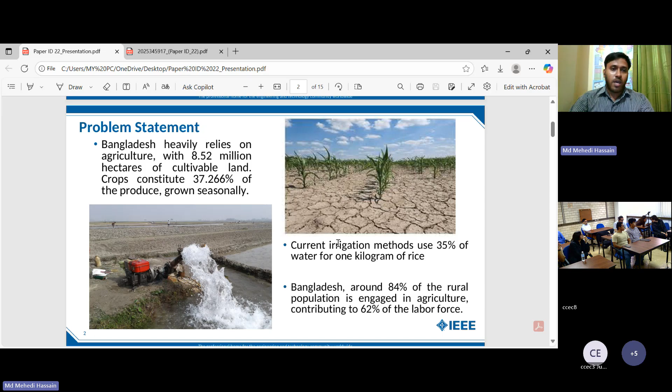Our main objective in this research is to build a smart irrigation management system, a reliable and easy monitoring system, reducing the complexity of existing systems, and making it cost effective, because most people in Bangladesh cannot afford costly irrigation systems. That's why we focused on this issue.

First of all, Bangladesh is a riverine country. Around 54 rivers flow across the country, covering two-thirds of our total land. This is always dependent on tides, high and low, and that's why canal water monitoring is an important issue in Bangladesh.

It can also involve pumping water, and some of this research includes tools for that. Some research can detect soil moisture, some detect rainwater, as well as daylight and sunlight monitoring, to determine whether it is day or night.

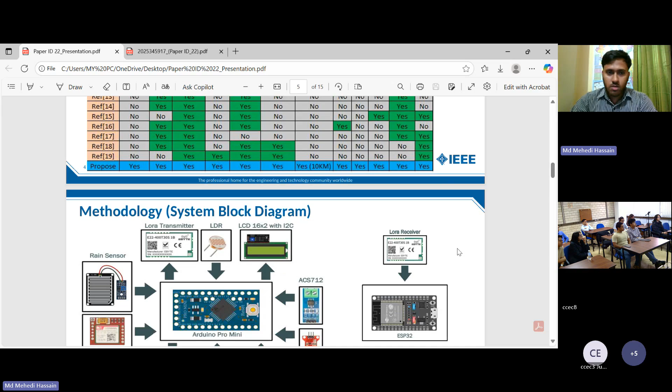Our system has two parts: one is the transmitter part and another is the receiver part. In the transmitter part, the operations are accumulated with an Arduino Pro Mini, and we also have an LCD monitor, LDR, and an asynchronous water level sensor.

We also have a soil moisture sensor, humidity sensor, and a relay for controlling water pump switching, as well as a rain sensor, and for SMS notification we use GSM.

The other part is the receiver, using LoRa, and it is accumulated with an ESP32 microcontroller.

This is the system workflow for the transmitter part. In the transmitter part, all sensors have a threshold value to determine which operation, like pumping, can start or stop. All these parameters are checked gradually, and there are two decisions: motor on or motor off.

In the other part, there is the receiver operation where all data is stored in a data server using ESP32 and received via LoRa.

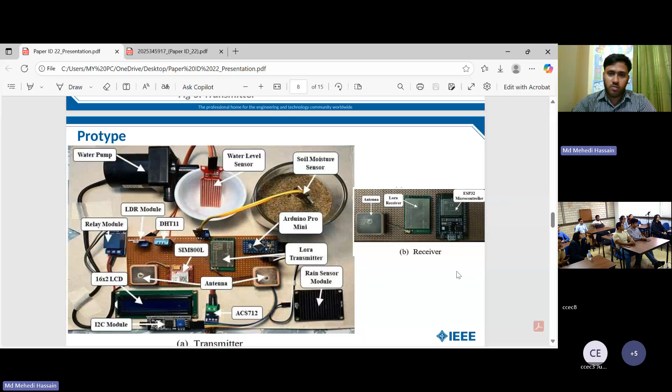There are many visual representations for monitoring all this data. On-site LCDs can gradually monitor all the data, and we are also building a mobile app that can monitor all the data gradually.

We also have a website, built using Node.js, Next.js, and CSS, and a MySQL database for storing large amounts of data.

In conclusion, it's a real-time monitoring system, easily accessible through website, mobile app, and email for long distance. In the future, it can be integrated with machine learning for predicting and analyzing large amounts of data easily, and there will also be implementation of renewable sources for sustainability.

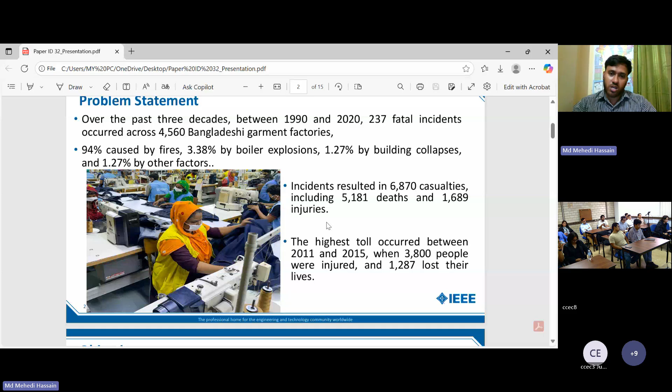Given this assessment, we have focused this research on an environmentally friendly industrial automation system, focused overall on garments workers as well as the factory, to increase factory safety. Our main objective is to build a low cost industrial central automation system, increase safety, enable easy monitoring, reduce existing complexity, and be cost effective. In comparison with previous research, some of these precaution measures include an LCD, SMS, buzzer, or mail, mobile app, or website.

Some have been focused on fire detection, temperature control and detection, as well as water sprinkling whenever fire incidents occur. Some have also focused on gas detection, and most of these factories don't have exhaust fan cooling systems, which is a main root cause of incidents in Bangladesh. Some of these incidents occur irregularly, and currently it can be improved.

Industrial load control is another big issue for our factories, because some factories don't care about this issue, and there needs to be a good risk assessment to prevent accidents. Our system also has manual control as well as a touch sensor for running this operation on and off.

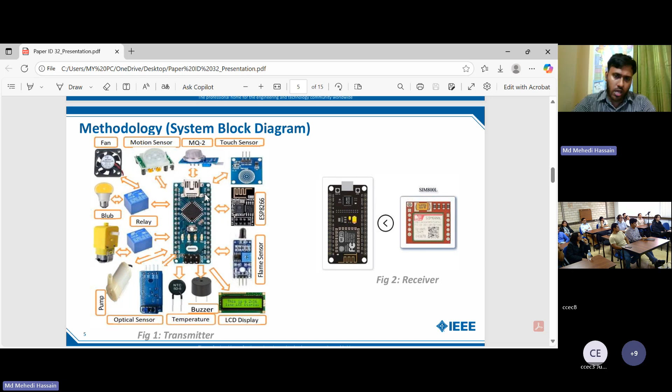This system has an assessment of input values, and some of these sensors are analog sensors. In the triggers, the signal is converted to digital for faster sensing. The data communication also uses HTTPS protocol for secure communication, protecting against external threats.

All the sensors include a fire sensor, optical sensor, motion buzzer sensor, relays, and exhaust fan. For the load in the prototype, we used a light to monitor these issues. There is also a DC motor.

for fire sparking. In the receiving part, a Node MCU and a GSM module are used for on-site data availability and SMS communication.

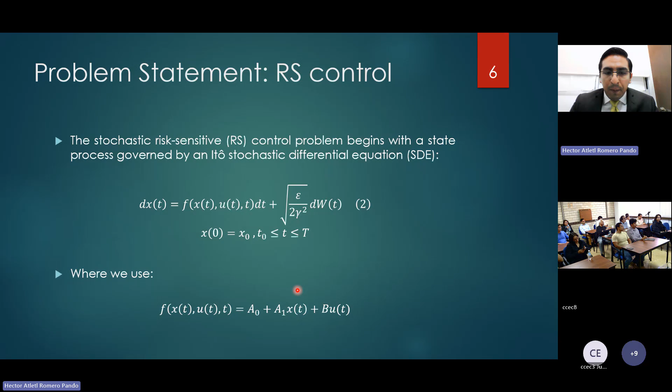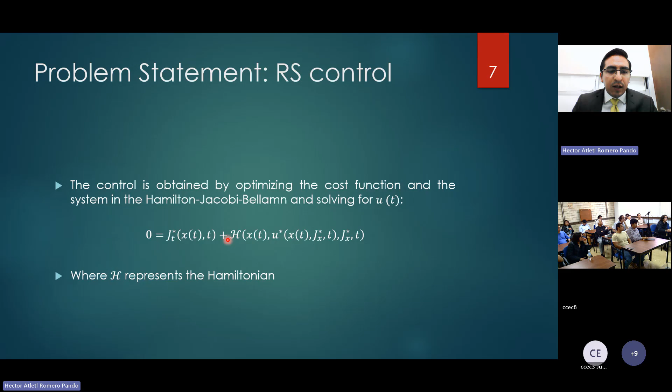Having a linear system, here for the functional, we obtain the control law by optimizing in the Hamilton-Jacobi-Bellman equation and solving for the optimal control, which in our case is U. This U star is our optimal control, and here H represents the Hamiltonian.

We begin with the application: the simple pendulum, a classical mechanical system that exhibits periodic motion. But the particularity of this system is that we are going to use the nonlinear model of the pendulum. In our case, we are under the effect of a DC motor that introduces a torque variable, which is going to be our control signal.

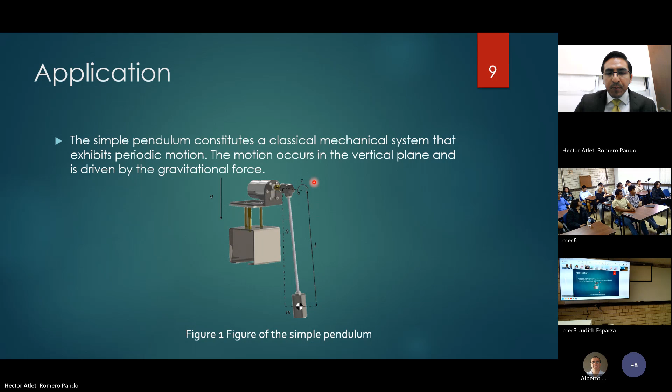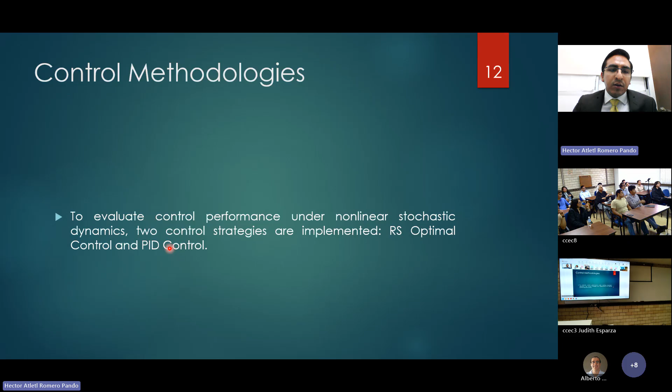To evaluate performance under nonlinear stochastic dynamics, we are going to implement risk-sensitive optimal control and PID control, comparing both. First, we begin with risk-sensitive optimal control. After introducing the Hamilton-Jacobi-Bellman equation, we get this control law.

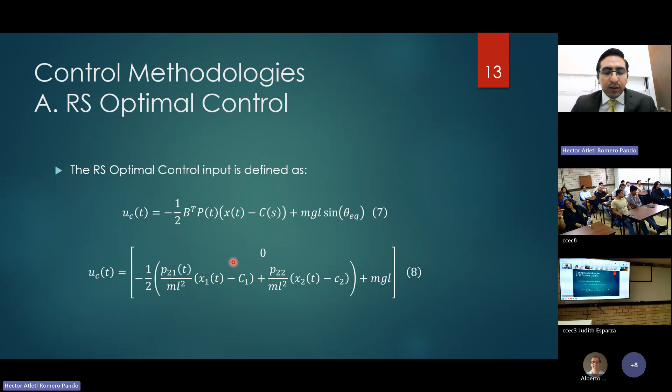This term is a gravity compensation. Developing the math a little more, we get this control vector, which indicates that in state 1 there is no control, and in state 2 this is the control that we are going to apply.

This is the asymptotic value for element 1,1. These are the asymptotic values for the 1,2 element, and these are the asymptotic values of element 2,2. Because this matrix is symmetric, elements 1,2 and 2,1 are the same.

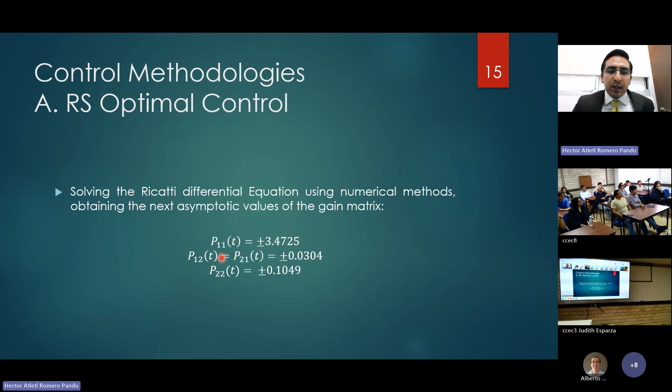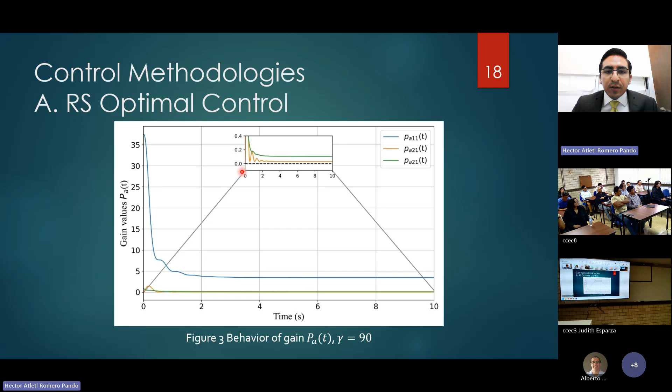So we can see here, this is the behavior of every element of the gain matrix. The blue is element 1,1, green is element 2,2, and orange is element 2,1. This is before we apply our transformation, and this is after. As we can see in the zoomed inset, the elements never cross zero, so it remains always positive.

Now, for PID control, we initially use the Ziegler-Nichols method for tuning. We start with a proportional gain of minus 5.438, integral minus 15.106, and for derivative gain minus 0.489. Our gains are negative because we are using the error in a non-conventional way.

The conventional way is desired point minus state. We are using state minus desired point. It is not going to affect our dynamics, we just have to adjust the sign of our gains.

So a subsequent manual adjustment was performed here to refine the new gains. For proportional gain, we keep it the same because we have already reached our target value. For integral, we reduce the gain in order to decrease the ponderative effect of the error, and we increase the derivative gain in order to smooth the curve of the system.

So now for results, the system was simulated in Python, and the state errors and values of the cost function and the data are summarized in the tables shown in this section. Our variable parameter is going to be our epsilon value, which allows us to regulate the influence of the noise.

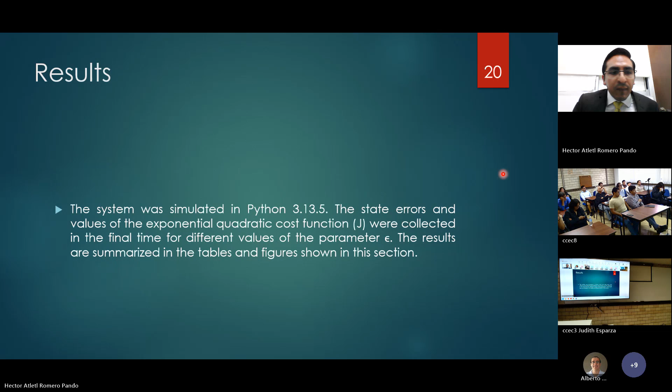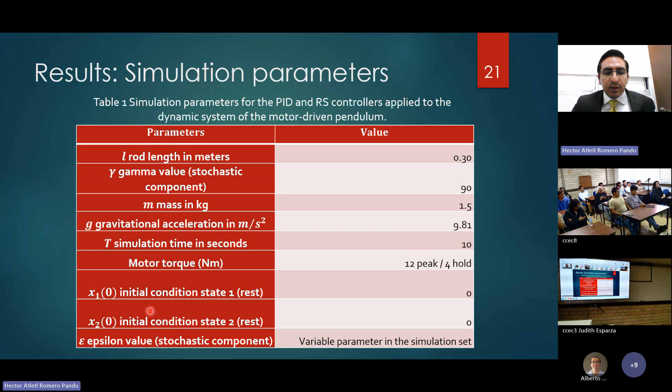So here are our parameters and the values we used. For the rod length, we used 0.3. For gamma, we use 90. For mass, we use 1.5 kilograms. The gravitational acceleration is convention, 9.81 meters per second squared. We simulated in 10 seconds. For motor torque in Newton meters, 12 on peak, 4 on hold. We start from rest, so both states start at 0, and we are going to vary epsilon in every simulation.

But in both trajectories, in both controls, the errors are so small that you can see both controls are effective, and the main difference is that the risk-sensitive has less cost values.

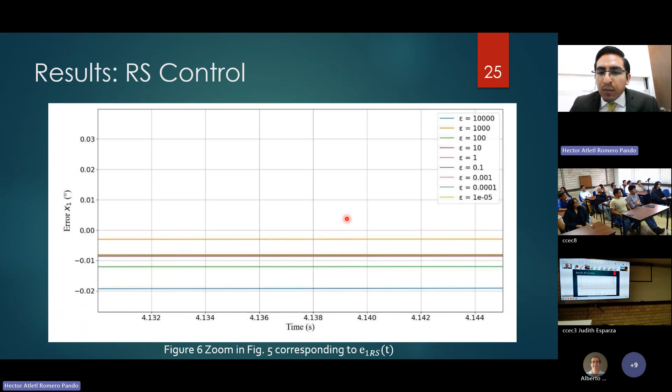We can see here also in the plot for the error of state 1. It seems to be just one trajectory, but as we zoom in the inset, we can see that the trajectories are enclosed approximately from minus 0.02 to 0. We can also see that as we increase the epsilon value, the dispersion of the trajectories increases, but for lower values of epsilon, the trajectories remain so close to each other.

And we have the same behavior for the error in state 2. The trajectories are so close that they seem to be just one trajectory, but in reality, they are just so close to each other.

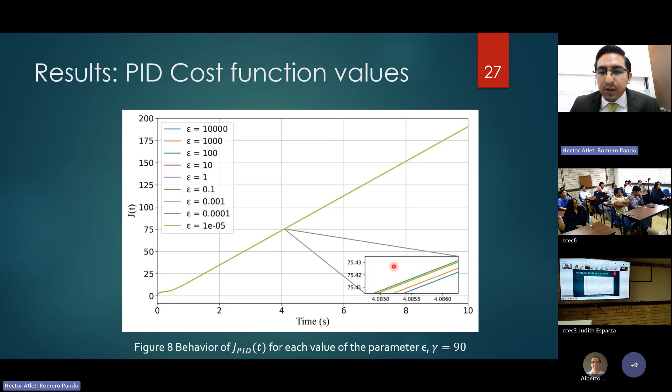And so here are the results for PID. For PID, we have the same behavior. As we can see here, the dispersion of the trajectories is a little more, but it's also so small compared to the scale.

For state 1, we have the same behavior. The trajectories remain close, but when we do an inset, we can see that the trajectories are enclosed between almost 0 and a little more than 0.01. And the same behavior remains that for lower values of epsilon, trajectories are so close to each other, and the dispersion increases as we increase the epsilon value.

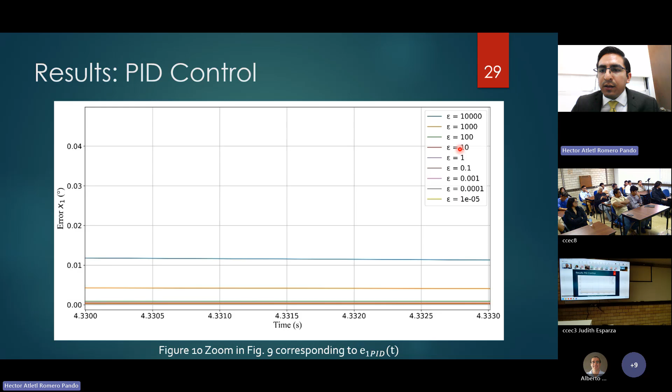And same behavior for state 2 in PID control.

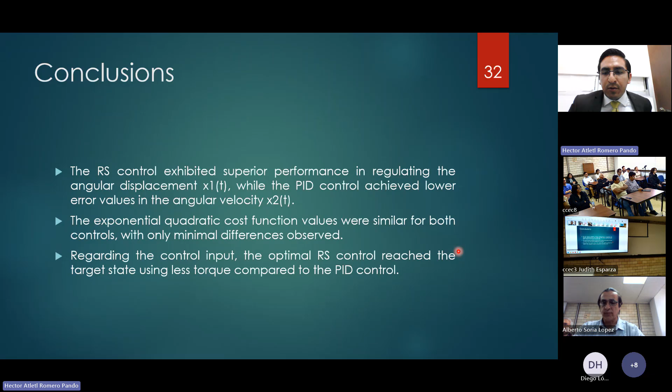So we can see that they have almost the same behavior in every aspect we have analyzed, but in the torque, the difference is much higher. And that's our references. Thank you for your attention.

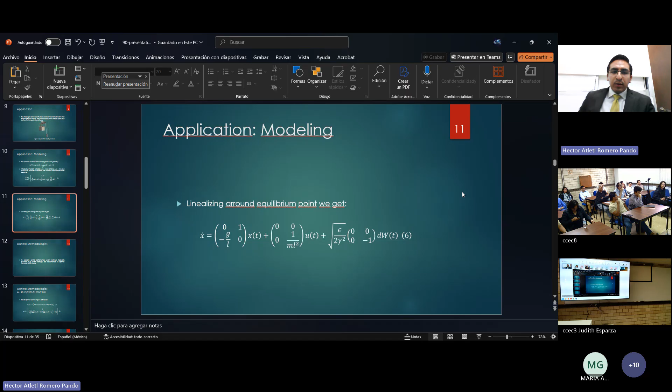But you haven't compared it to any other energy-based control strategy. We could have compared our method to any other, as long as we use the same measure tool, which in our case is our cost function. We evaluate them under this cost function. As long as we evaluate the controls under the same cost function, we can compare the controls.

Okay, thank you very much. If there's any question, then we'd like to thank the speaker for his presentation. We have a question, there's one more question. Yes.

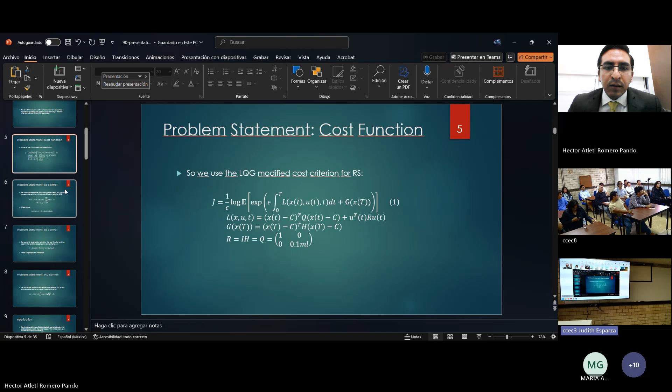When one is making experiments with noise, normally one should appreciate the effect of the noise on the graphics, maybe by making a zoom. Could you please comment about this? Because the noise is a quantity which one cannot do almost anything about. The noise should be present in your graphics, yes.

Yes, it is because the methods we are using are based on regulating the influence of the noise. So the behavior we expect is that the noise gets compensated. It can be seen in the result tables that the errors are on the order of exponent -3, exponent -4. So in the graphs, the scale isn't enough to appreciate the influence of the noise.

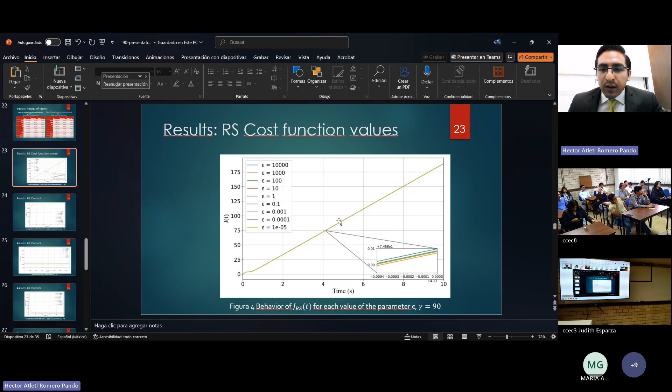But if we do a better zooming, the influence of the noise is visible. Maybe we could add that graph in a future article so the noise can be seen directly, because in our simulations we do in fact see the noise when we zoom in, but we have to zoom in. At the scales we have here, the influence of noise isn't visible.

No, I think it's not correct. Sorry. Oh, okay. Thank you, thank you. Okay, well, is there any other questions?

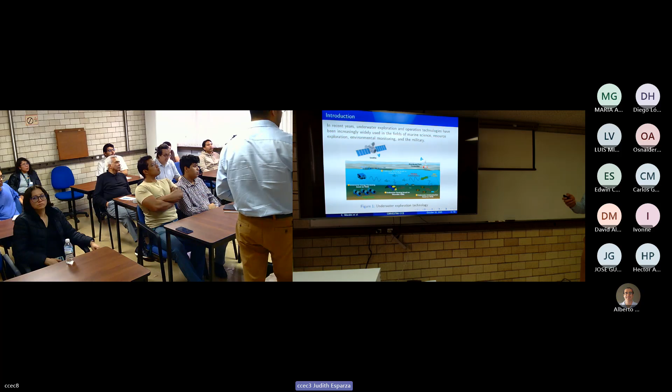Considering these frames, we can represent the mathematical model in the kinematics, or in the body frame, as given in equation 1. But to implement the controllers, we have to represent this first expression into the inertial frame, given in equation 2.

Let's make some assumptions about the vehicle that we modeled. First, the vehicle's motion is on the x-z plane, that is, in some way we can measure the states x, z, and theta.

We assume also that the roll and yaw angles are stable, that is equal to 0. Also, we consider that our vehicle is in low speed motion, about 2 meters per second. That implies that the Coriolis matrix is equivalent to 0, and the inertial matrix MA is diagonal, and the last assumption is that the vehicle is calibrated such that the buoyancy is neutral.

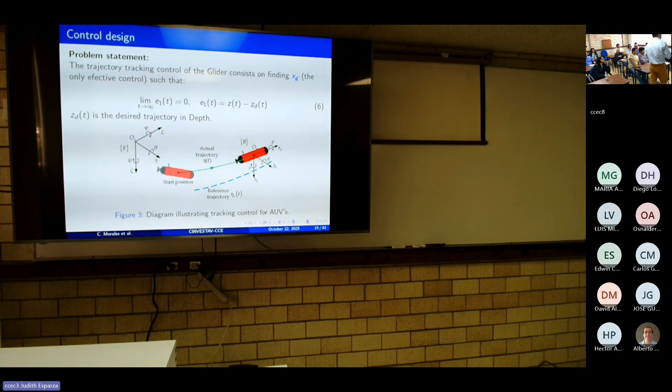In this case, we propose a super-twisting algorithm controller. This proposed controller is based on a sliding mode.

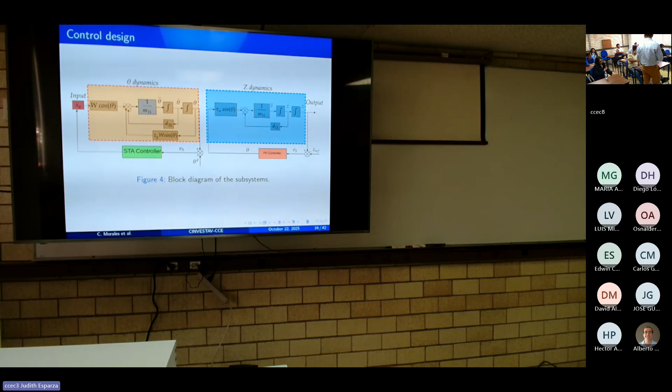Recalling the equations of the z and theta dynamics, we can define the trajectory tracking errors as expressed here, E1, E2, E3, and E4, where F theta is part of the dynamic model. After that, we can define the trajectory tracking dynamics as expressed in equation 9, corresponding to each dynamic, z and theta, and then we can propose the controllers for the z and theta dynamics.

For z dynamics, we propose a controller like a PD controller as expressed in equation 10. For the theta dynamics, we propose a controller as in equation 11, where USTA is the super-twisting algorithm, and F1, F2 are the compensation terms.

Now I will give the idea of the stability of the whole system. Before, we stabilized each system independently, but of course these systems are interconnected or coupled. So the way to make this interconnection is by using the backstepping philosophy.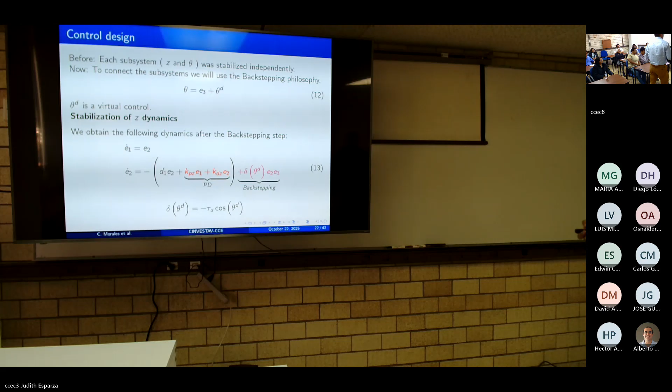To analyze the behavior of this dynamics, we can propose a Lyapunov function as given in equation 14. After carrying out the derivative of this Lyapunov function, we can get this inequality given in equation 15.

We have this positive term that arises from the backstepping step, and we have to deal with this term. To do that, we invoke Lemma 4.7 about input-to-state stability.

After carrying out some algebraic manipulation, we can find this expression given in 16, and with these conditions and this kind of functions, we can conclude that the system 13 is input-to-state stable.

Now I'm going to analyze the stability of the theta dynamics, given these dynamic errors corresponding to theta. With the control proposed in equation 11, and after defining our sliding variable as in equation 18, and after a change of variable, we can propose a Lyapunov function for this super-twisting algorithm as in equation 19.

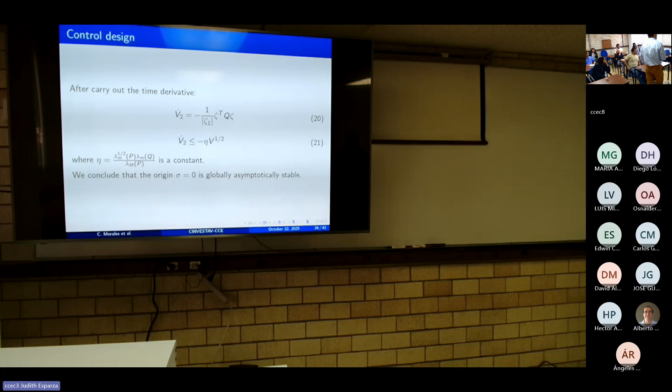After that, we can propose a composite Lyapunov function as given in equation 22, and the time derivative is given in 23.

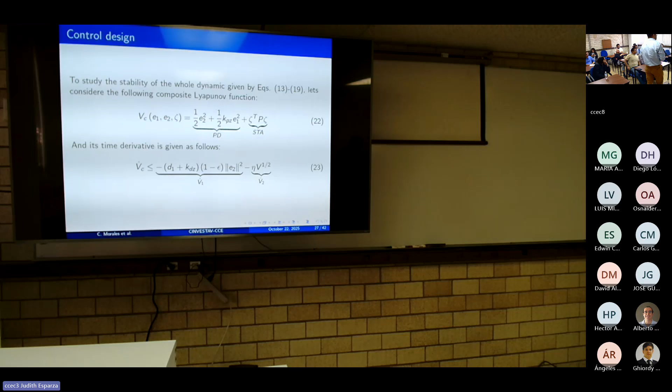By invoking lemma 4.7, which says that if the system 13 with E3 as input is input-to-state stable and the origin of the system 19 is globally asymptotically stable, then the origin of the whole interconnected system is globally asymptotically stable.

Now I'm going to show some simulations. In scenario one, we have the nominal case, where the robot follows trajectory tracking without any kind of disturbances. The second scenario, we applied a buoyancy disturbance that affects the depth dynamics. The third scenario is a disturbance affecting the control input XG.

First, we have here the trajectory tracking error, the trajectory tracking in depth and pitch. We can see that the smallest values of the errors are obtained with the proposed controller.

In the second scenario, we have the tracking in depth and pitch, and the smallest values of the tracking errors are obtained with the proposed PD-STA controller. Here we have the trajectory tracking errors in depth and pitch, and here we have the signal of the control input.

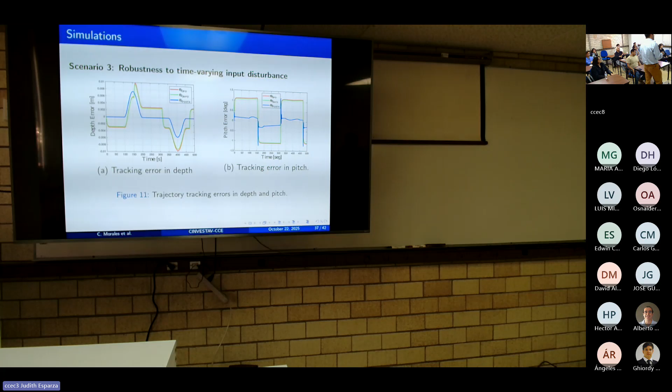The third scenario shows the depth tracking and pitch tracking. Again, we have the smallest values with the proposed controller. We also have the tracking errors, control input signal, and the conclusions.

The proposed controller addresses two key challenges on the underwater vehicles. The first is managing the underactuated dynamics of the system, and ensuring robust performance in the presence of disturbance and modeling uncertainties. The simulation results validated our proposed controller, which was compared with other controllers like PD and nonlinear PD, demonstrating that the proposed controller achieves better performance.

For future work, we would like to carry out some experiments in real time. So that's it. Thank you.

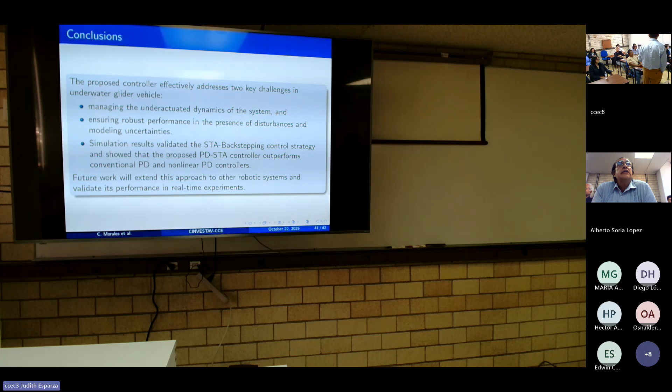Yes, but my question is more like, in real life, what does that represent? Like a current? Not like current. You can imagine that on the way the vehicle is navigating, you push something to affecting the depth dynamics. So it could represent that. Okay.

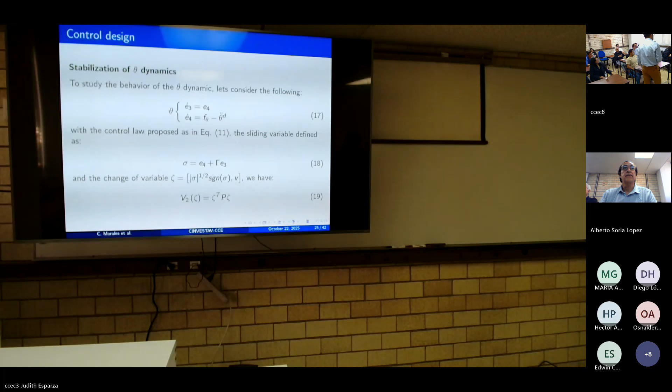Another question please, can you show us the design of the controller? The backstepping design? Yep. Here? No. Oh. Here? No.

Do you consider for the design the disturbance term in W1 and W2? You put that disturbance terms, one in equation number 7 and W2 in equation number 8. For the analysis, I did not consider this term.

Okay, so do you know, did you consider some characteristic of the disturbance? Is the disturbance bounded or differentiable? Actually, I'm not considering this perturbation term for the stability analysis.

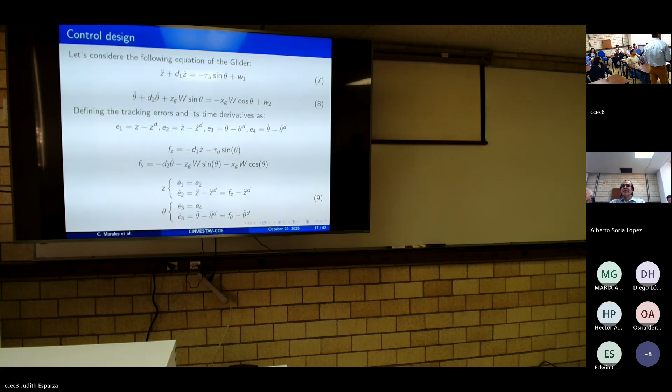When we make simulations and implement this kind of disturbance, we couldn't expect that this perturbation is the same in real experiments, and that we will have the same results. For example, the gains we use in PD or super twisting will not be the same in real experiments, so we have to retune them.

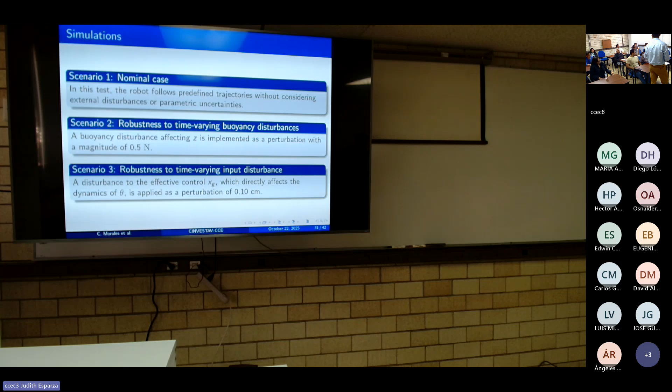Can you put the assumptions for your model? It was at the beginning. Yes, there, that one. Okay. How, because there are other assumptions in your model?

Yes, and how realistic is that to the real implementation? Does that happen, or how close is it? For example, this one could be realistic because in real time our vehicle is moving at low speed, not fast speed. So these assumptions could be realistic, and this could be realistic too because we calibrate the system so it will be enough for avoidance.

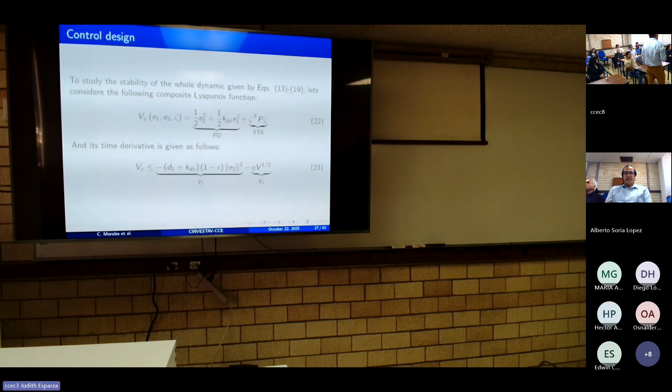Could you please go back to your simulations and give more details, because it's not very clear, it was very fast. If you are comparing, with respect to what? Because you propose a PD and a super twisting algorithm, you should have at least put in your slides the equation of the super twisting algorithm, for instance. And it is known that the analysis is good when you have total disturbance, for instance.

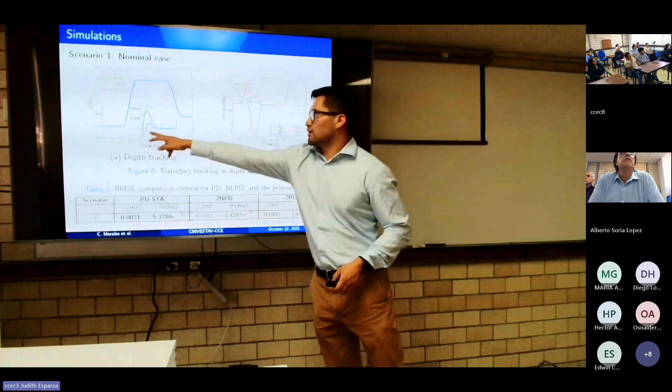In scenario one, we have the nominal case. We are comparing this PD. So the PD is in the first loop, in the z dynamics, and the STA is applied in the second dynamics, that's why it's PD-STA. Here we can see that the PD-STA has less overshoot.

Also here in the theta tracking. But here, for example, what does it mean, those two times PD? Two times PD, or two times nonlinear PD, is because if you remember we have two dynamics. Two PD means we propose a PD in the first dynamics, and another PD controller in the second dynamics, that's why it's two PD.

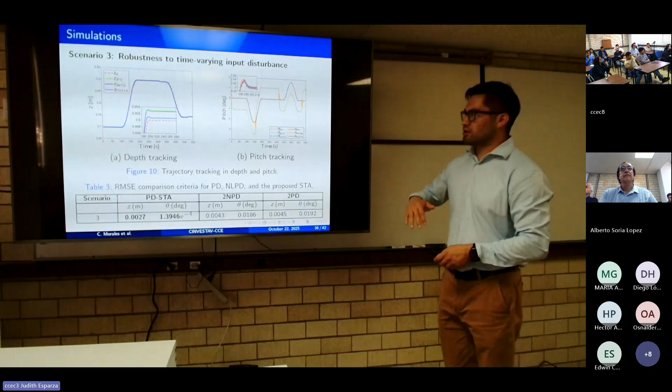Here, for example, we can see again that when we perturb the theta dynamics, we have less error with the proposed controller. And here, when we disturb the theta dynamics, of course we can see the results in the theta tracking. We can see that the proposed controller performs better. I don't know what else to say.

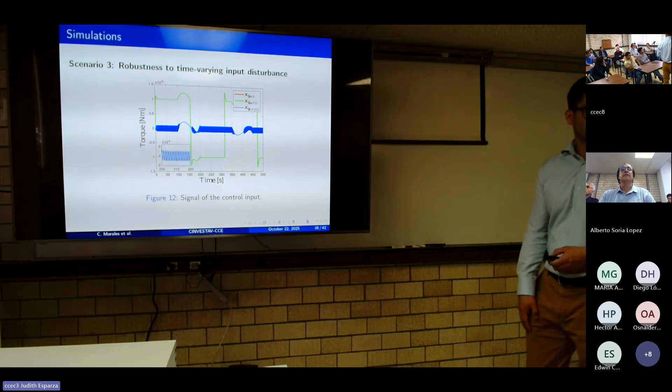Could you please show the equation of the input? Yes, with respect to the question of the organizer of the session: is this kind of oscillation acceptable for real-time applications? You are demanding a lot of work from your actuator. Maybe it's not a good solution. If I had my own glider, maybe I would not allow you to use this kind of thing, because you may destroy it.

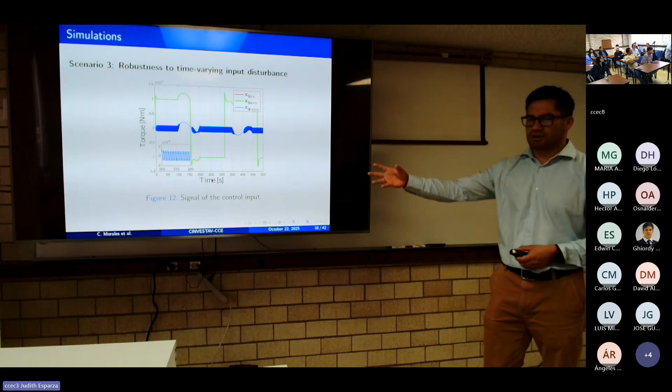Of course, when we use this kind of controller based on sliding mode, we have this kind of effect called chattering. Is that chattering, or is it oscillation? No, it's not chattering, it's oscillation, but this kind of oscillation could still not be good for motors. But we can see that the magnitude of this oscillation is very small, and if it's still not working, we can implement filters before this control input goes to the motors.

How can you improve this? We can implement a filter for this control input. Okay, thank you.

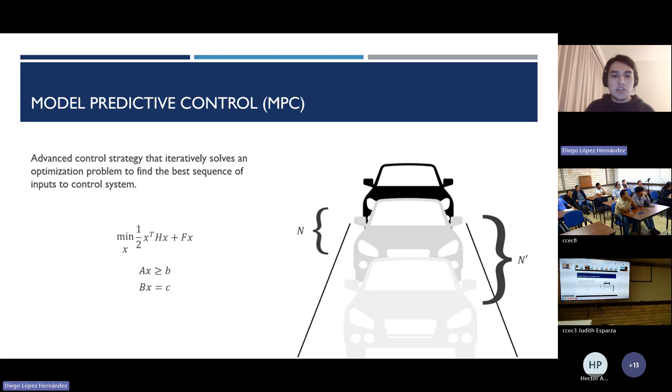The only difference between normal driver logic and model predictive control is that the controller actually takes into account all of the states leading up to that point ahead of time. So one might see clearly why the bigger the prediction horizon and the bigger the dimensions of the system, the bigger the computational load will be, which poses quite a problem for real-time applications.

And here is where we arrive at our objective, which is to propose strategies to apply model predictive control to embedded systems, specifically to holonomic robotic bases.

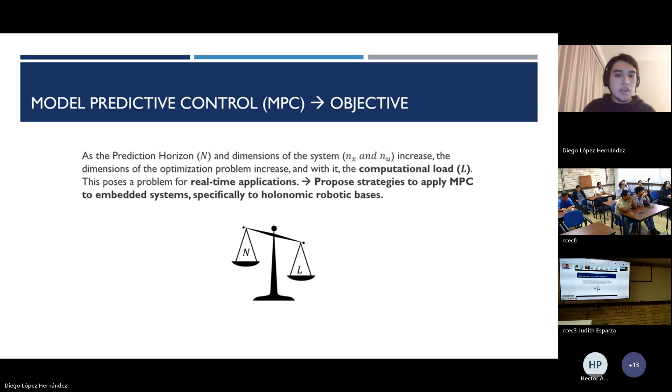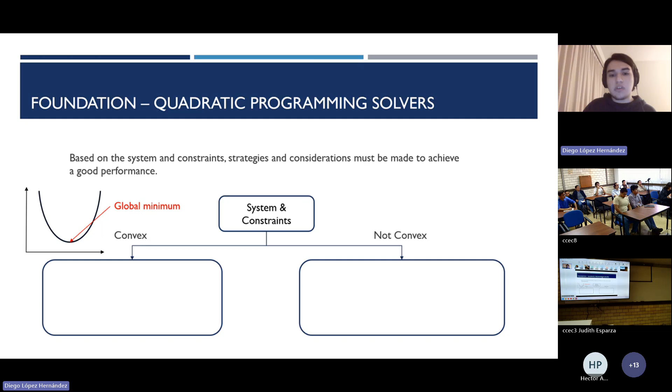First, let's talk about which types of systems we can have. For simplicity's sake, we'll define convex systems as those that have one global minimum instead of a local minimum. For these, you can usually apply linear model predictive control solvers like these ones. However, when you have a local minimum, you have to use a different strategy, because these solvers cannot distinguish between local and global minima, like sequential quadratic programming and learning-based methods.

Now, unfortunately, in robotics you usually have lots of rotation matrices, so you have to use nonlinear model predictive control if you want to actually find the global minimum for these types of systems. However, for holonomic robots, if what you truly care about is only the position and the computation time, you might make some considerations that will allow you to use first order methods. Which one? Well, we selected the proximal gradient method.

So you have your cost function, composed of a convex smooth part and maybe a non-smooth component. The proximal operator works by receiving an initial guess and finding a balance between the value of this non-smooth function and staying near that initial guess, which can be a bit abstract. But when the non-smooth function is the indicator function, because it is an optimization problem, it basically throws out any options outside of the feasible set, making this proximal operator a projection.

For the final part of this method, to actually get close to the minimum, you apply a gradient step, which depends on a constant that you define. And of course, this way you can ensure you will eventually arrive there.

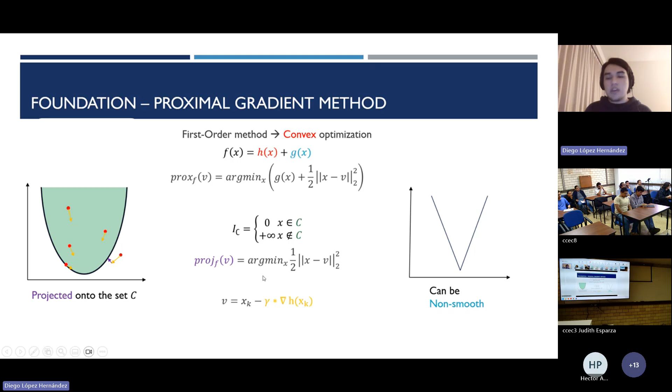In a practical example, it might look something like this: let's say in one iteration you have your optimal set of inputs, and in the next iteration, if you attempt to evaluate the same inputs, you might not have the same global minimum. So you have to apply the method again to get close to the minimum.

Now let's talk about the model of the robot itself. We chose a mecanum wheel base, a very well-known type of robot, where the wheels are responsible for the holonomic movement. Your model might look something like this: we have your state variables, the relationship between the wheel frames and the robot frame, your inertia matrices, rotation and linear, and your system.

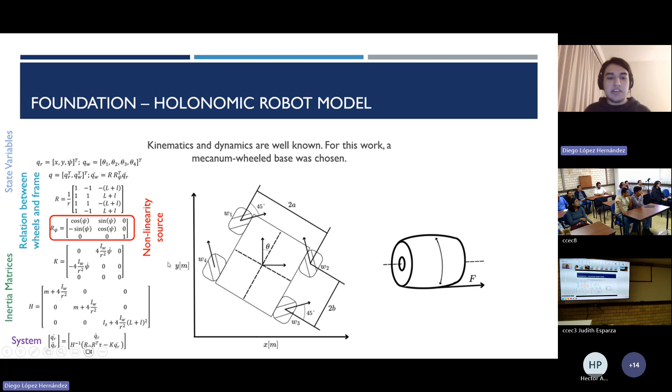Please note that the nonlinearity stems from the rotation matrices, but we will handle that soon. Let's rewrite the system as a state space representation like so, where we consider the inputs to be directly the torques of the motors, and the states being the position on X and Y and the angle, and of course their derivatives. So there we have 6 states. For notation purposes, we'll use I and O, referring to identity and zero matrices, like so.

Now, once again, considering that you only really care about the position of your holonomic robot base, and you really do not care what's the orientation of the robot, well, you might want to constrain the rotation movement like so, which would have the effect on the system by making it more compact and easier for the optimization problem.

For example, restraining this state will have the immediate effect in the state matrix like so. Now, please note that the rotation matrix is still considered, but instead of depending on a state, it will depend on the initial angle of the robot before beginning its movement. So, for example, if the initial angle is 0, the rotation matrix is actually an identity matrix.

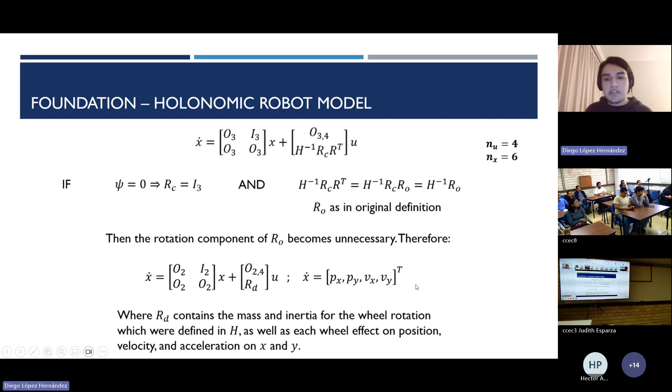Now, of course, since we're not considering the rotation, our model can be more compact, considering only the position in X and Y and its velocities, reducing the amount of states that we actually have to consider for the optimization problem. Now, the next consideration we will make stems from basically how the model was defined.

Because the wheels were enumerated in this order, we have this relationship between the wheels and the base frame. But if we notice something, we can rearrange the order in which we number the wheels and basically arrive at a conclusion that this is the same matrix twice, but concatenated to itself. So basically, we have the same system twice in a single system.

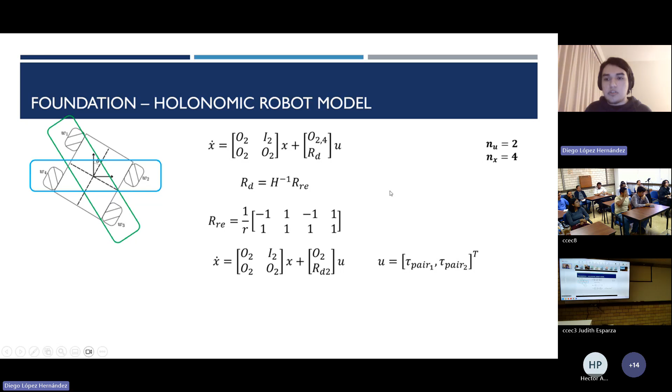And what this means is that we can group the diagonal pairs of wheels to reduce the amount of inputs we actually have to compute. Why? Because it is not necessary to compute the same thing twice. And of course, this would be the result of the model.

Now, lastly, for the last consideration, instead of using a single huge model predictive control for all of these states and inputs, we can use a cascaded control scheme where the PID controller, the common controller, handles feeding the set points to the motors, and the model predictive control can focus on the position and the odometry of the robot. Of course, this will have the effect of reducing the amount of time you would have to spend on each iteration to compute the inputs.

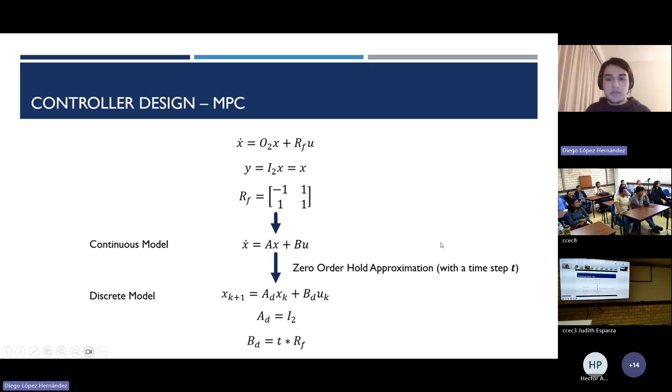So now that we have our continuous model, we can start to define the model predictive control by first transforming it to a discrete model with an approximation method, for example. And first we have to extrapolate this discrete model. Instead of the next state, we say the next 2 states, or how would it look like?

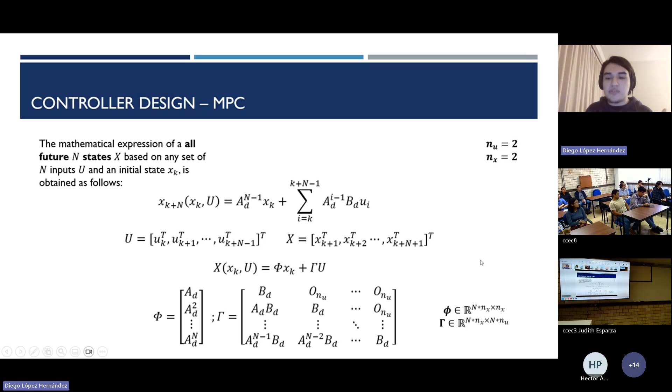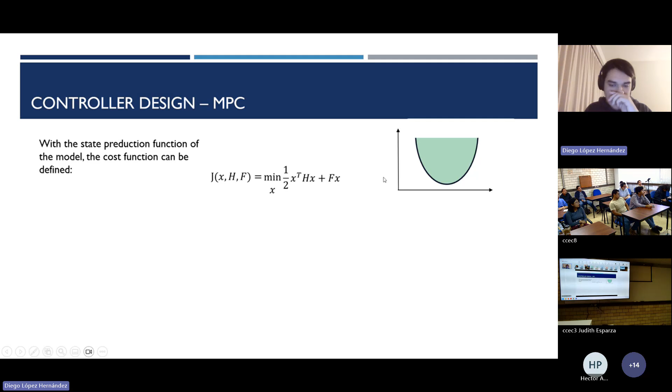So with this, we can begin to define the optimization problem, which usually looks like this, because it has to be convex to actually use the proposed method. So our cost function will look something like this, where the first thing of note is that the set point is the vector set point where we actually want our robot to go.

The first cost is the difference between the actual position and where the robot wants to go, so that at the end you arrive at the goal. The second cost is the magnitude of the input, so at the end of the motion you basically zero all of your motor accelerations. And the last cost is the difference between one input and another, so that you have a more smooth motion of your robot. Now, please note that each of these costs has a weight to it.

So by changing it, we will be able to change the behavior of the system. For example, we have to be careful by not making the cost of the input magnitude too high, because otherwise the other cost will never overcome that cost, and your robot would basically not move at all.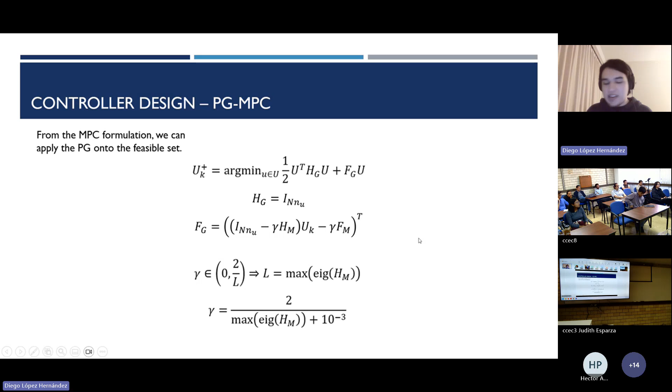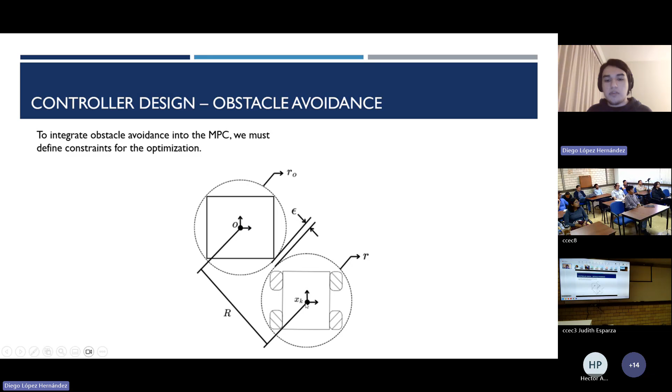Now, lastly, we have to consider obstacle avoidance for the robots. Normally, when you have a robot and an obstacle, you want to avoid collision, so you define keep-out zones like so. You can relate the origin frame of an obstacle and the origin frame of a robot to change that keep-out zone to something more like this.

We use a piecewise polynomial approximation that defines an inequality constraint based on where the robot is with respect to the obstacle. So it might look something like this. You have many overlapped keep-out zones, and the one that applies depends on where the robot is with respect to the obstacle.

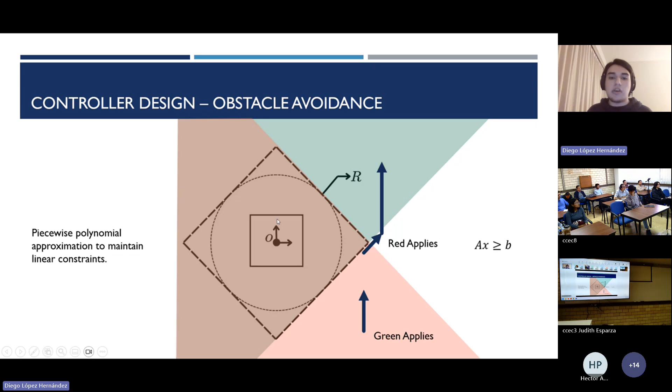For example, if you're over here and want to go over here, the actual keep-out zone would be the one in this quadrant rather than the one you're currently on. Once you move from quadrant to quadrant, the inequality constraint will switch.

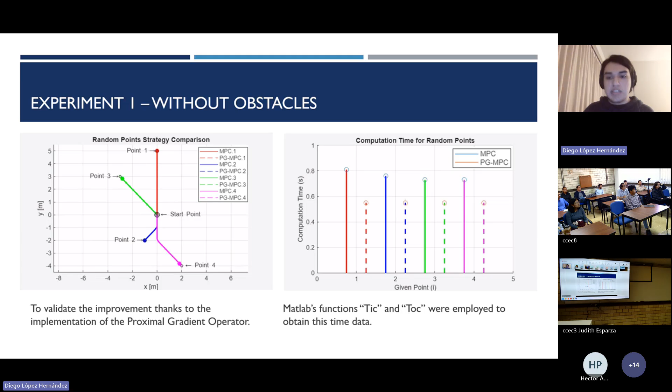First, we'll run one without obstacles to ensure that applying the proximal gradient method has a positive effect on computational time. We put timers on the code to measure how much time it took. We can see they both achieved the same convergence to the same point, however the proposed method is a bit faster.

With this proof, we can move to the next experiment, where we apply obstacle avoidance. Once again, we measure the time spent by each method, the normal one and the proximal gradient one, and we can clearly see the proposed method is still faster. Once again, they both competently avoid the obstacles and arrive at the designated goal.

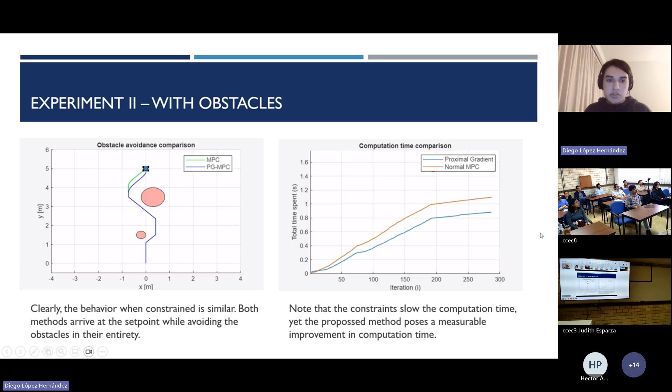For future work, we could take this algorithm and control strategy and implement it on a real robot to validate that it works in real-time applications.

Additionally, we could compare it to one of the mentioned nonlinear methods, such as sequential quadratic programming, which is much more computationally expensive, to see what the main benefit was of having such considerations, at least for real-time applications. Thank you so much for your attention, and I look forward to your questions.

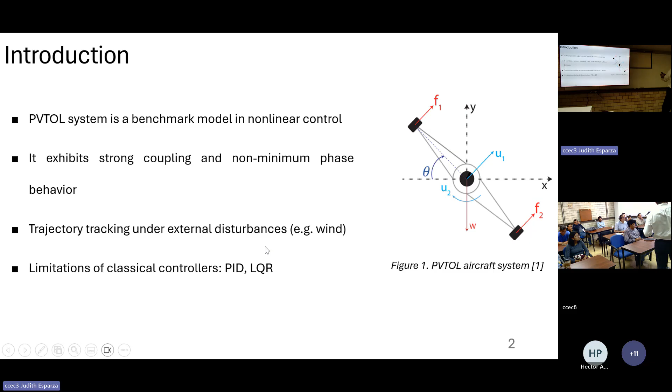That's why it was proposed an adaptive PD controller using a single neural network. It will present online weight update and won't need prior training. One of the hypotheses is that it will exhibit robustness against external disturbances. Finally, it was compared with LQR using the ITAE index.

So for the control scheme, before we go to the comparison between both controllers, I would like to explain each of them on its own. For the classical PD controller, we have the reference minus the actual position, multiplied by a proportional gain, and then we add the derivative gain times the derivative of the error with respect to time.

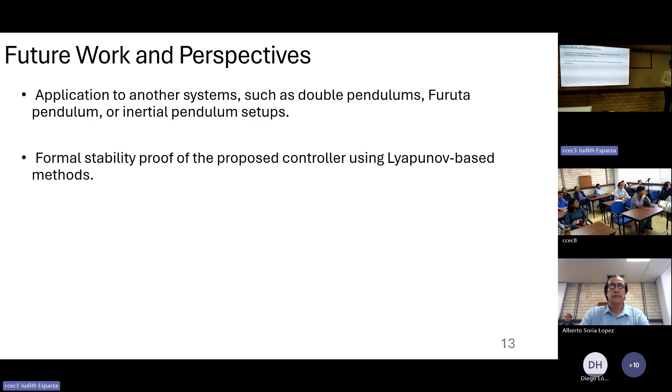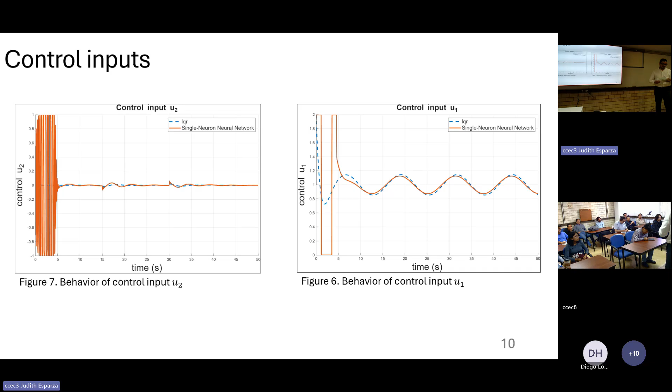Here, in order to control the horizontal position, we have an X reference trajectory, a desired trajectory. And in order to get a rolling moment, a desired rolling moment, we suppose an ideal system here from the X acceleration, and we can set the coupling term to 0. So we are just left with this part over here.

And if we set a constant height, well, as we are working with the normalized dynamical equations, the gravity and the weight are set to 1. So the 1 is the minimum force that we need to control the gravity. So the U1 term goes to 1, and if we solve for theta 1, we can obtain a theta reference, which is the angular position from the X reference.

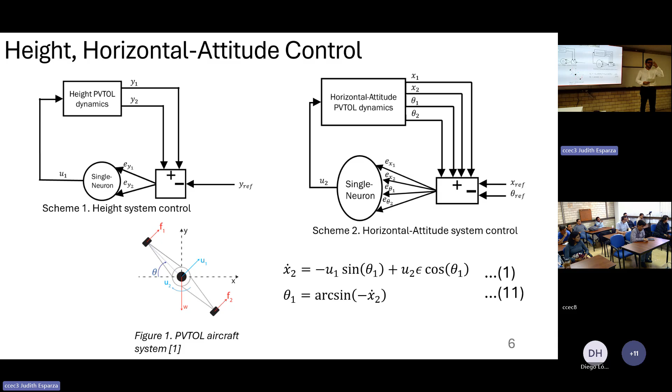But for example, in the graphs, could you please show us the graphs? Oh, here now I understand.

Okay, for example, here between the 10 and the 30 second, the vehicle is at a constant height, but it's impossible to move in the x direction with a constant height. For example, imagine this: you are moving in this direction, but you cannot move with a constant height, because if the vehicle has an orientation, the vehicle will move, of course, in the height, with an angle.

So it's, I think, only if you restrict the movement, but I don't think it's realistic, because only imagine the movement of the vehicle, it's impossible only in the case that you have a movement in exactly this position.

You can move without changing your height, because if you don't want to change your height, you need to be in this position. But this is not possible because the PVTOL cannot do this, because you lose this degree of freedom. If you are moving in the zeta axis with two thrusters, and if you put it in this position, you cannot control the height anymore, because you lose this degree of freedom.